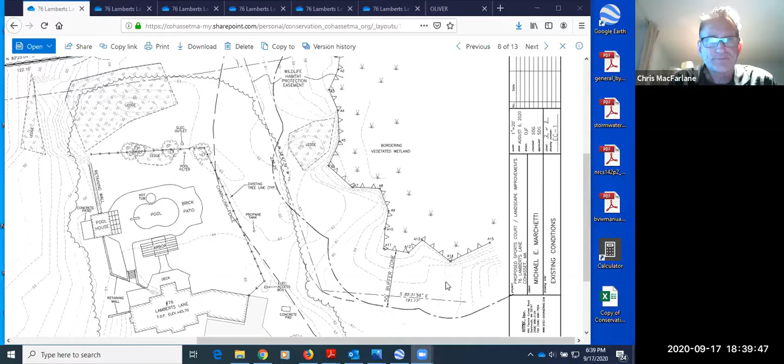Yes. So for orientation, north is to the top of the exhibit before you. You see a little to the lower left side, the existing dwelling, 76 Lamberts. Behind the house is the deck, a little arbor area, and then the existing pool and associated patio area. This area is an existing lawned area behind the dwelling.

On the right side of the drawing, you'll notice there is an identified bordering vegetated wetland that has been mapped on the site. That was mapped by Christopher Capone. Christopher is a wetland scientist, he also happens to be the conservation agent for the town of Westport, Massachusetts. So Chris went out and did the delineation of that particular resource area.

And you'll see the other significant features on the property, the topography. There are a number of ledge outcroppings, as you might expect in this area, and those are depicted on the plan. And then we have the two buffer zone lines also depicted.

We have the inner 50-foot zone highlighted there, and then beyond that, the 100-foot buffer zone line extending in that general location. So the eastern edge of the site is within the buffer zone. The balance of the property is not within a buffer zone area.

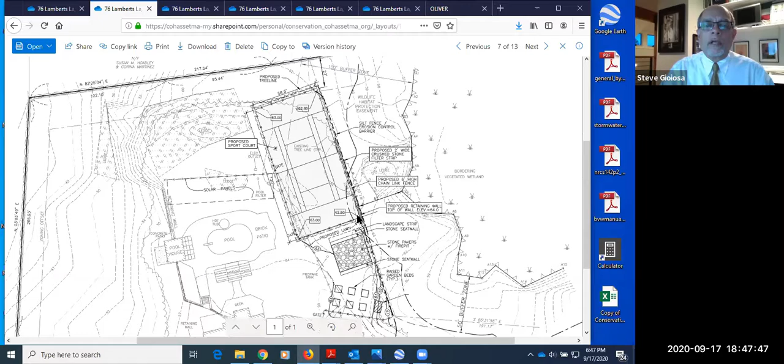The activity on the property at this point with the proposal before you does include a very small portion of the work to extend into the inner 50-foot zone. Right in that area, it's a small portion of the sport court and a little bit of the grassed or landscaped area just to the south of the sport court. That represents about 150 square feet of land area. At its closest point, we would be 42 feet from that little point in the wetlands at the wetland flag as indicated. So we do look at that as a minor encroachment into the inner 50 feet.

We think that the natural conditions of the property dictate where we have placed these features or proposed elements on the property, allowing us to construct them with the least disruption of the natural topography and soils of the overall parcel. So even though there's a little bit of activity in the 50-foot zone, we think that the offset of less earth movement and construction activity in other areas of the site gives us a net benefit in that regard, that hopefully the board or the commission feels comfortable with allowing that particular variance to move forward.

I know that one of the neighbors to the property, I think the neighbor immediately to the north, has submitted some comments and questions, and I might try and attempt to answer some of those to at least get them into the initial presentation.

They asked a question about the 100-foot buffer zone and the 50-foot buffer zone. Those lines are measured from the resource area, and they are to scale at 50 feet and 100 feet, and they follow a radial pattern from the peak points. So we are depicting the line as it exists, measured from the bordering vegetated wetland line. I think that was one of the questions they had.

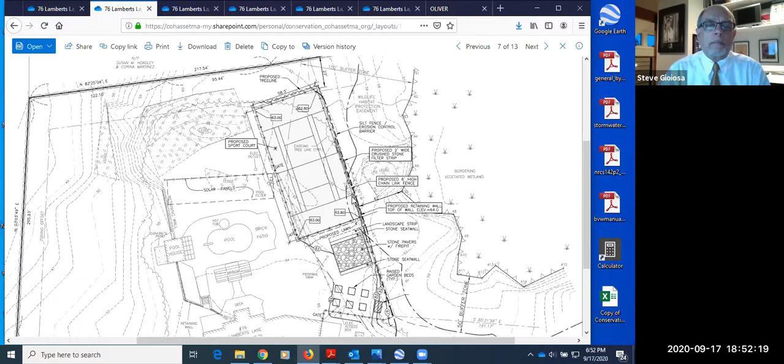I don't know whether, Jeff, you have the ability to display that. Yeah, it's in here somewhere.

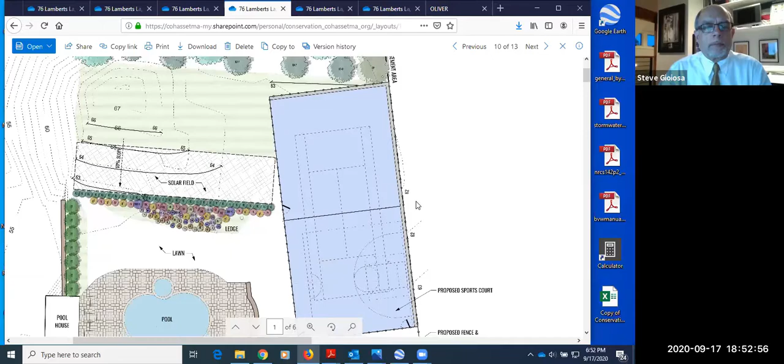Okay, so the planting plan covers a number of areas. We can start with the area to the north of the tennis court that has been designated for plantings along the border to create a buffer to our northerly abutter, who raised these concerns. Adjacent to the solar panels, a planting bed is being created, with some extensive buffer plantings in that location. Then continuing down to the sitting area, which is more in the buffer zone, you'll see the extent of plantings designated here.

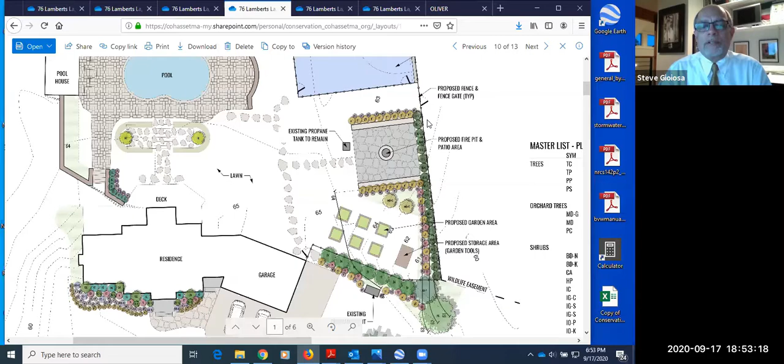I'm going to defer to our landscape architect to describe in better detail what types of plantings are being proposed here, and I'll turn that part over to her. We'll be happy to answer questions after she gives a brief explanation of that element of the project. Sure, thanks for the introduction.

So my name is Kara, I'm a landscape architect with Skyline Landscapes. In terms of the planting selected, I've used as many native trees and shrubs as possible in place of ornamentals on this property. For example, along the edge of the border to the wildlife easement, I've designated inkberry hollies.

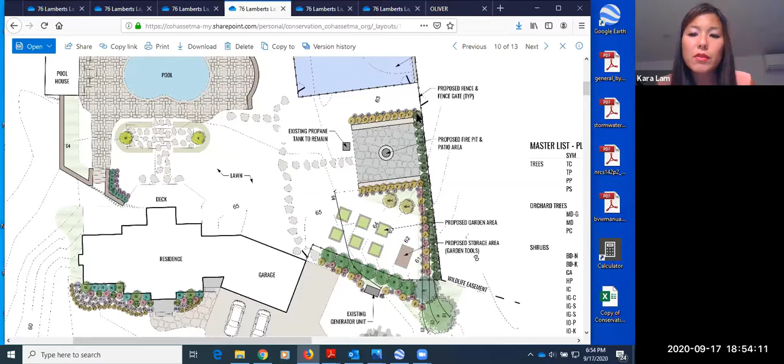These are native shrubs and great for wet conditions. Along most of the foundation and also north of the court, the trees selected north of the court and the solar panels should mostly be native. There were a few non-natives, which I think might have been preferred by the client. But in general, I've selected as many native plants as possible, and we can also add more to this project.

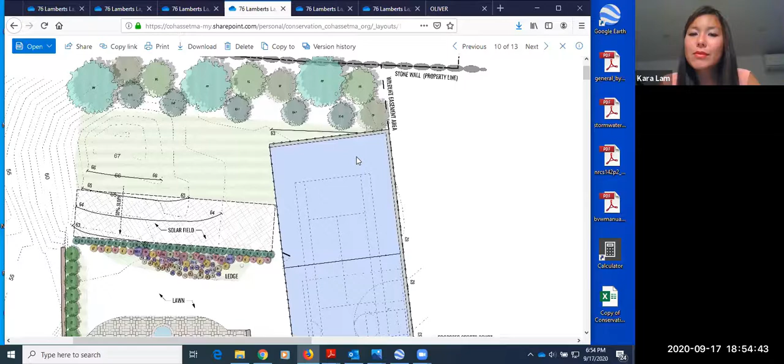All right, we have a list of native plants which we would like you to conform to. Have you received that list? Yes, Jeff sent it to me yesterday. All right. I'm happy to use that list moving forward. Yeah, it's quite extensive, I think there's more than enough choice. Sure.

Are there any questions regarding the plants? I feel like the planting plan is very straightforward. I have screen planting and foundation plants as was requested by the client. So if we needed to add more native plants to the project, I'm happy to do so.

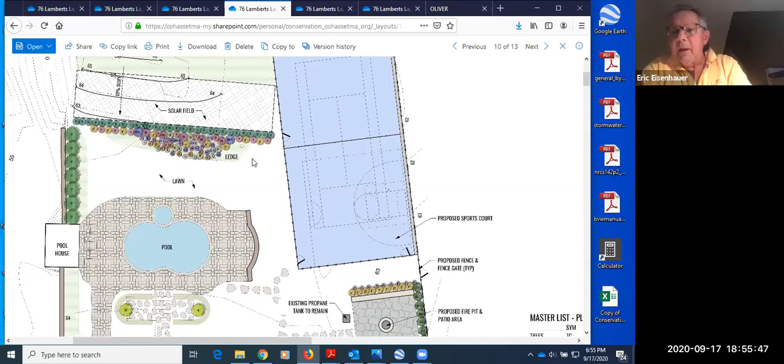I think as we go through the discussion, we may make changes to this plan, in which case that will require you to redo your planting plan, Cara. Absolutely, I think it's probably not worth our while to go through all the details at this stage of your planting plan, but maybe return at a time in the future, okay? No problem. All right, Jeff, do you want to give your thoughts on this, please?

Yeah, so the plan on its face appears relatively straightforward, but I think it's a little more complicated than that. So there's a couple issues. I'm obviously not a voting commission member, but I'm sure if we were to poll the commission, I think this work here in the 50-foot buffer zone would not be viewed favorably.

My suggestion, a couple weeks ago, I emailed Allison - I can't remember her last name, Steve. I thought Allison was the engineer on the project. I said she may want to think about moving this out of the buffer zone. It's not for me to say, it's actually for the commissioners to say. But I think this is going to be a serious damper on the project, I guess, for lack of a better word.

And then another issue too is with the stormwater permit - the rates and volumes in the stormwater management summary actually show slight increases post-development of volume and rate of water leaving the property, where actually the standard in the stormwater management bylaw is equal to or less than. So if this stone trench can have increased capacity to bring those numbers down to equal to or less than, that's another suggestion.

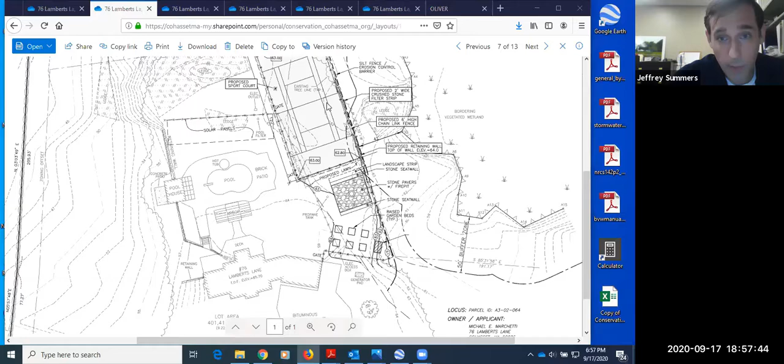And then also, when I visited the site the other day, I was kind of surprised to see that the entire buffer zone area was pretty much obliterated of vegetation. Here's a photo of what it actually looks like as of Tuesday.

The site plan basically shows the 100-foot buffer zone running down along this fence. So everything in here is in the buffer zone. All this vegetation removed. I understand there was a rock or ledge that was broken up, and I'm assuming material was brought in to form this, what looks like a dirt road.

None of that was permitted at this time. So going out there, I would actually like to go out again at some point, view this property with the 50-foot buffer zone, the 100-foot buffer zone clearly staked out, and the four corners of where the proposed court is to be located. And then also I saw the stakes for the easement, the wildlife easement. I would just like to see everything in the field.

I think if we all went out there and had a look, that would give us a better sense of the scope of this project.

I also imagine that the commission will, whatever is approved with this project, require that whatever area in the buffer zone has been cleared here will be robustly revegetated. So when I spoke with Kara the other day, I said you might want to hold off on this planting plan because it's going to change, I imagine.

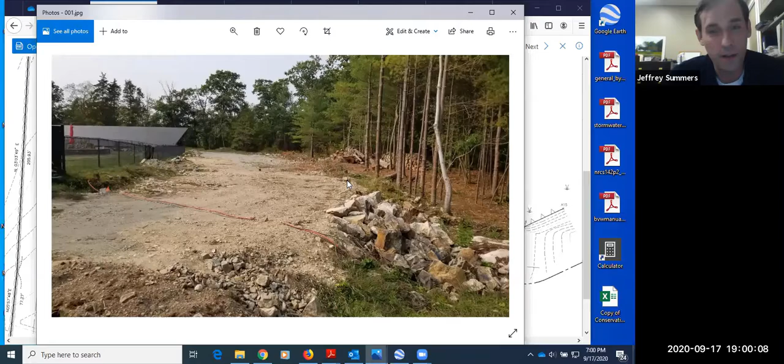This is the existing conditions. The existing conditions on the site plan, everything that was sent to us showed this as being wooded, and that's not what we're seeing here.

Here's another view, you can see the solar panel up here in the corner. So this is another view looking south. All this is in the buffer zone. I understand this is where the court is proposed to go, but I think we need to have some explanation as to why this is the condition that it is in today.

Anything else, Jeff? I'm sure I'll think of something, but no, not at the moment.

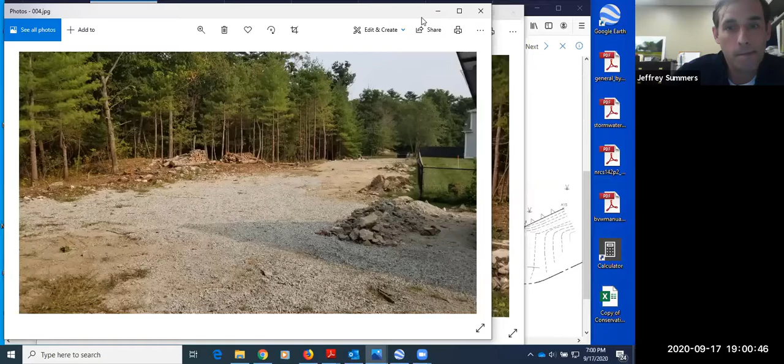I was down there today. I'm going to talk to you, Steve, because I think you're in charge of the project. I have never seen a devastation of a buffer zone as bad as this one in my entire time on the Conservation Commission. It looks like a moonscape. It's unauthorized, it's unregulated. I don't know why you did it, but before I go any further with this commission, I want an explanation from somebody as to how you can clear cut a buffer zone and then expect us to look favorably upon a project to build your recreational facility.

So let's start with an explanation as to what's going on here and why that was done.

Steve: Okay, so I think Jeff pointed out that our existing conditions plan does depict a tree line that is different than what is out there today. When we did our original work and survey, the tree line is as represented on our plan. Our involvement in the project at that point was to identify these physical features, and that's when we had the survey of the wetland line completed so we could depict that on the plans. My understanding, and I again was not involved in this, is that the construction of the solar panels, the solar company, went obviously beyond any point of authorized clearing that the commission or we would be comfortable with.